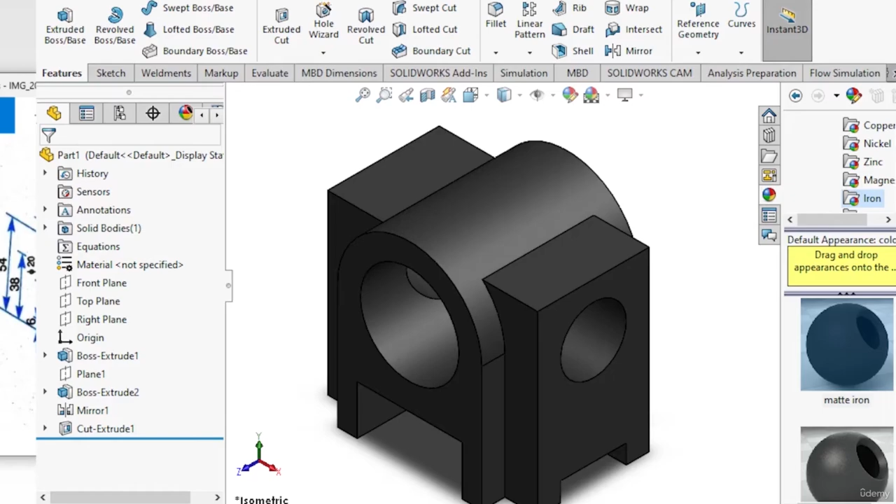Let's get started. Start from part, taking front plane, normal to. As the object is symmetric, we'll start with a central line. Another central line is required to get the location of the circle.

Now let's see the drawing. First of all, we have to draw one circle and one semicircle. Not circle, because we are drawing one right hand side only, so one semicircle and one quarter circle will be required. So we start from this arc.

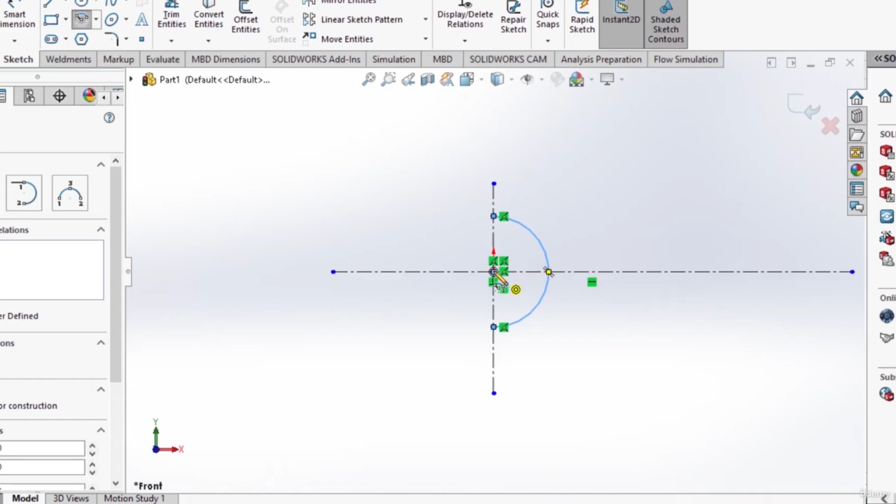Then we can start lines. We're drawing without any dimension, and the actual dimension can be provided after some time.

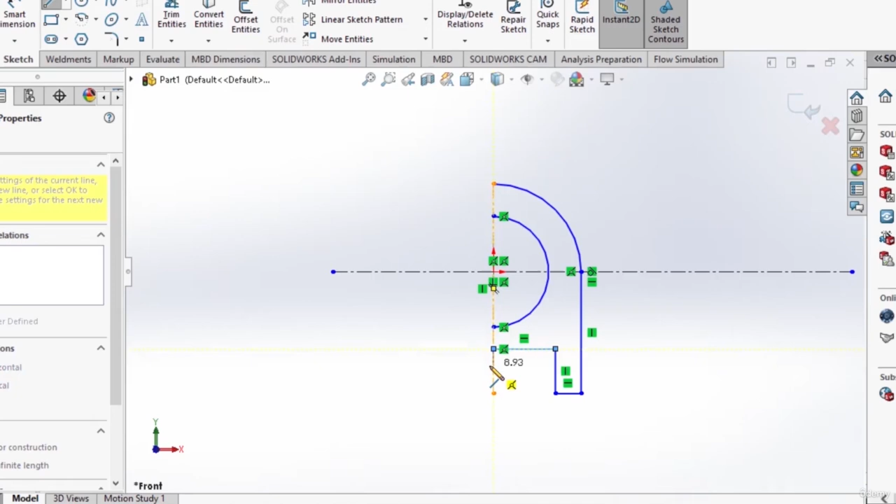Now let's provide smart dimension to that one and see the drawing again. The internal circle is having diameter equal to 30 millimeter. Now outside radius is 22 millimeter.

Smart dimension, this is 30 millimeter. Let's see the drawing again. Inside diameter is 30, and radius is 15 then. And in this case, radius will be 22 millimeter.

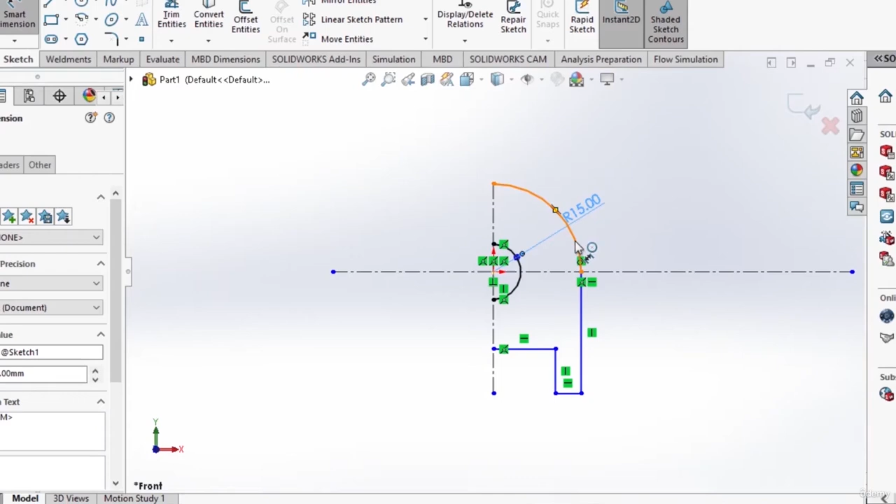Now these things appear. We can provide these dimensions also, no problem at all. The distance between these lines equal to 32 millimeter. How much is it? The distance between the lines equal to 32 millimeters.

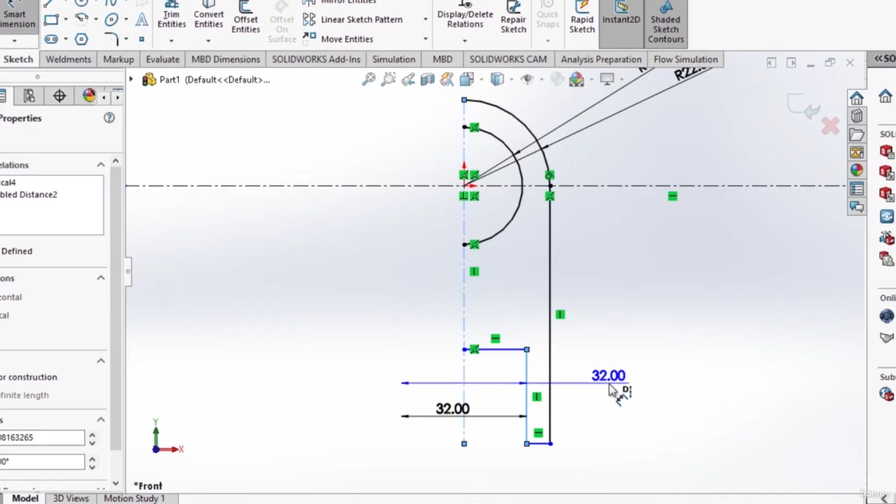So this one will be 32 millimeter, and also it will go up 15 millimeter. This is 15. Anything else? No, it's fine, it's done.

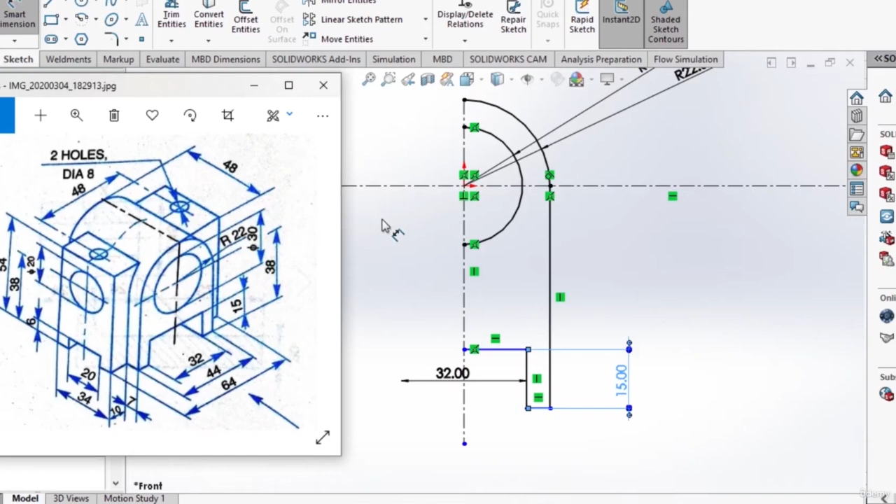So we have to make a mirror of this one. Exit from the sketch. Start mirror. It's asking to select the mirror entities. Select the entities, and asking to mirror about.

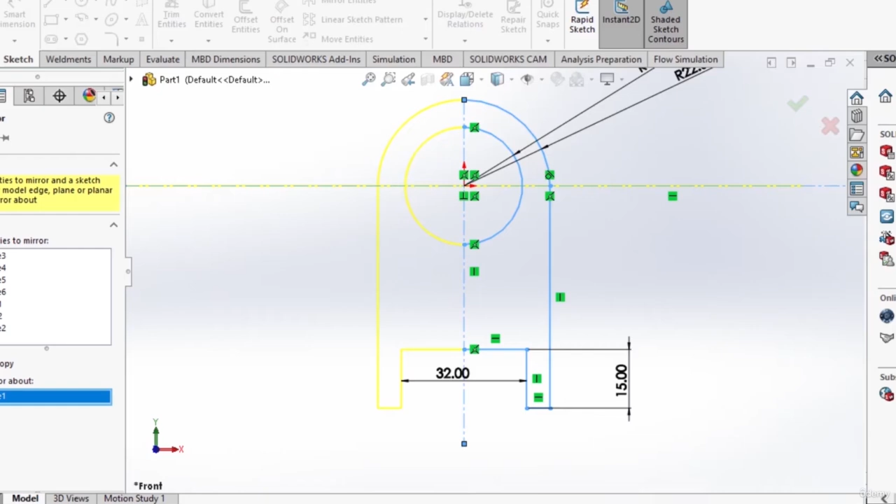So selecting the vertical axis, mirror is done. Next, we have to exit from the sketch and that has to be extruded. Select the sketch again, features, extrude boss base, and it should be extruded from the mid plane. Extrude thickness, you can see the depth, extrude depth will be 48 millimeter.

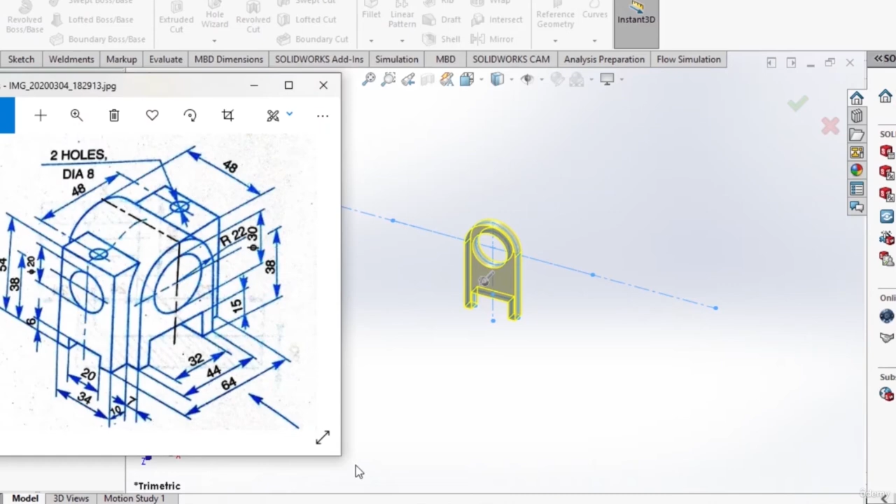Done, so again check. Next part, we have to move from left side. You can see the distance. The end to left hand and right hand is having maximum distance equal to 64 millimeter. That means from the central plane, this side will be 32 millimeter away.

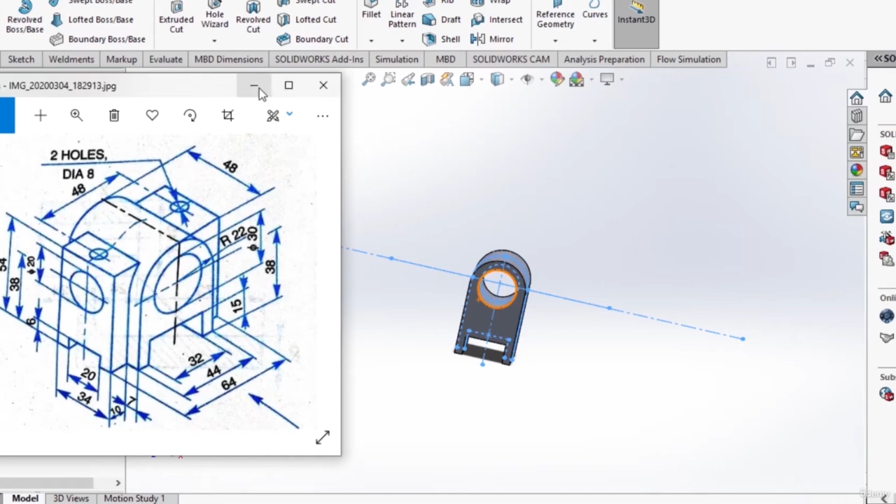So what we have to do is create a reference plane with respect to this central plane. You see the plane, this is the right plane. Right plane is at the center of this object. So with respect to the right plane, we have to make a plane which is having 32 millimeter.

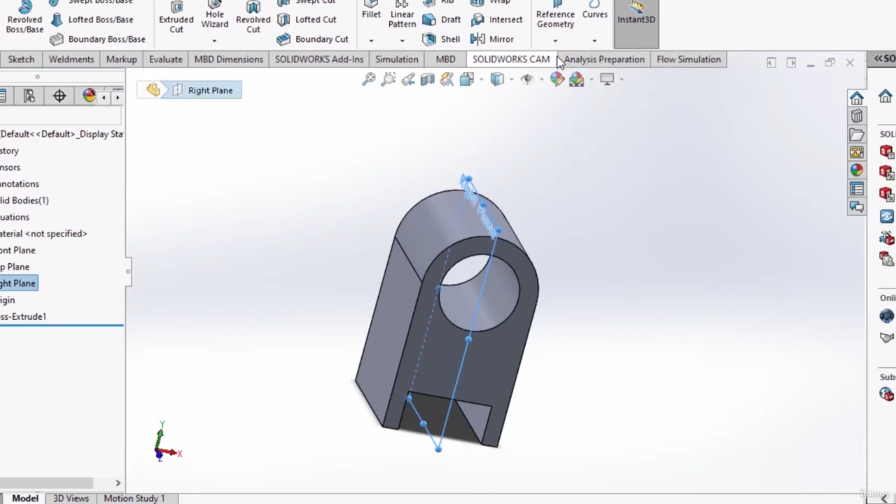So reference geometry, plane, and the offset distance equal to 32 millimeter. It will be on the opposite side, so flip offset. The plane is made. Now on the plane we have to draw.

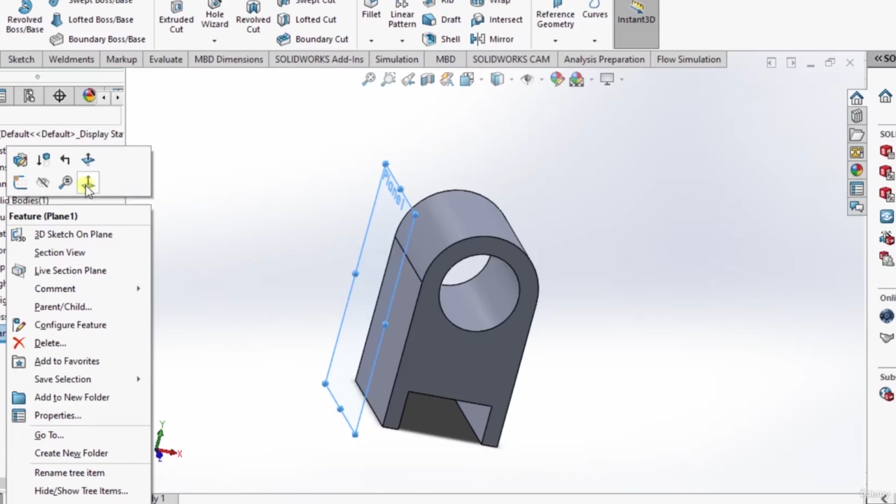Normal to plane, normal to. Let's see the drawing again. We have to draw again symmetrically because it is symmetric on both left and right sides. So better to draw a center line, sketch center line, done, sketch.

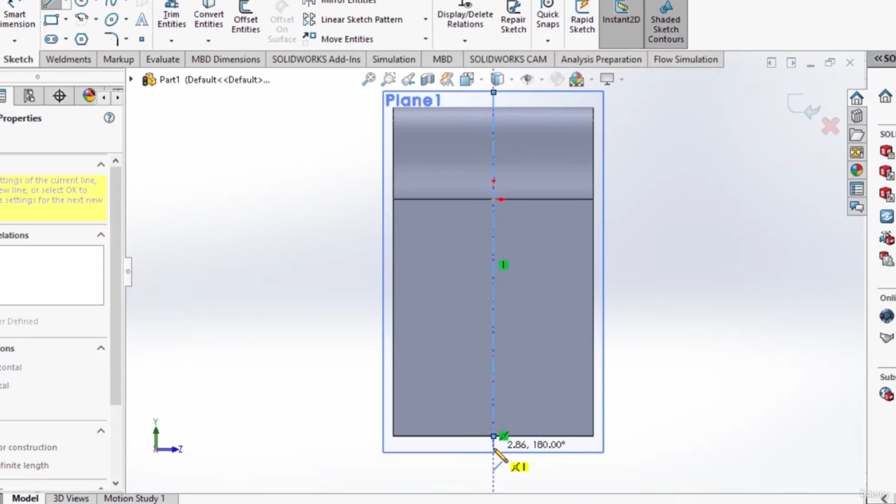Now roughly we can sketch this part. Finally we can provide smart dimension to that. Let's draw it.

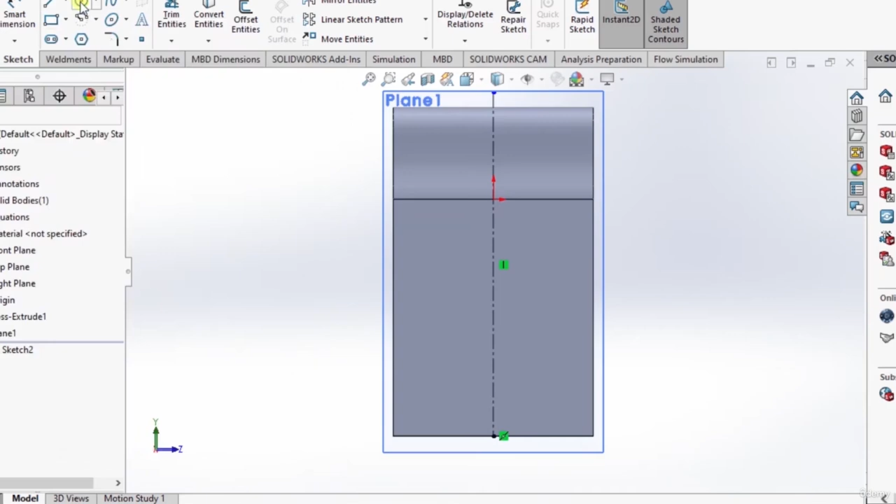We can draw one circular part. Not circular, we actually require a semicircular part. And again some lines are required, so straight line.

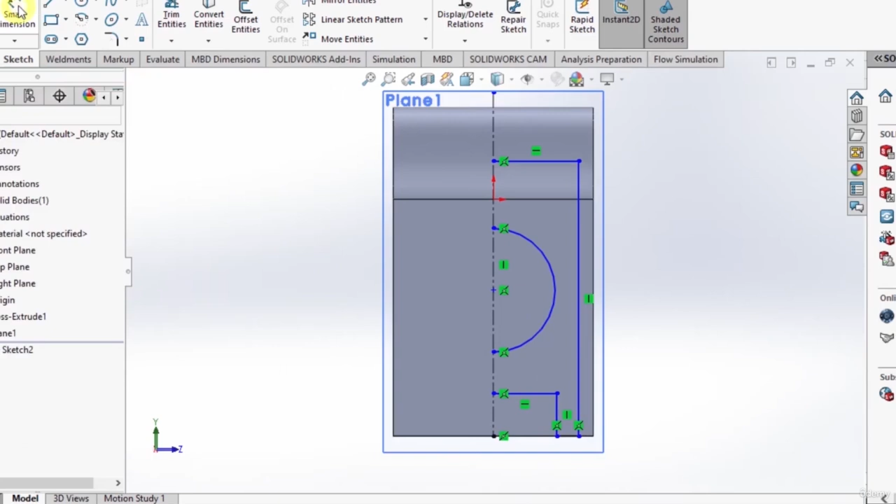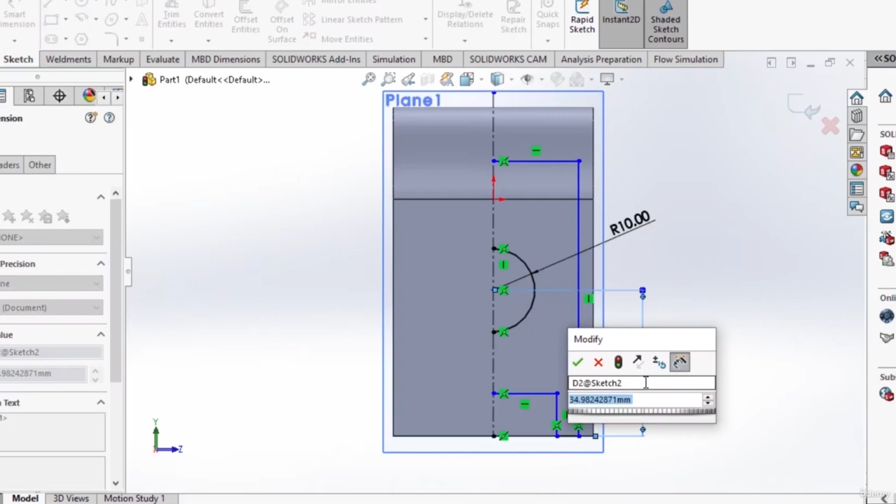Now let's put smart dimension to that one. The circle is having diameter 20 millimeter, the radius will be 10 millimeter. And from the base plane, location of the center equal to 38 millimeter. The total height equal to 54 millimeter, and this distance equal to 6 millimeter.

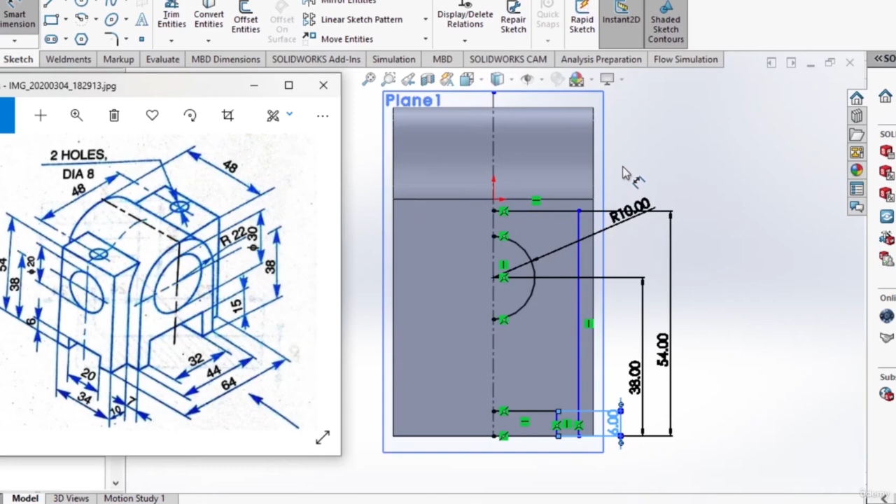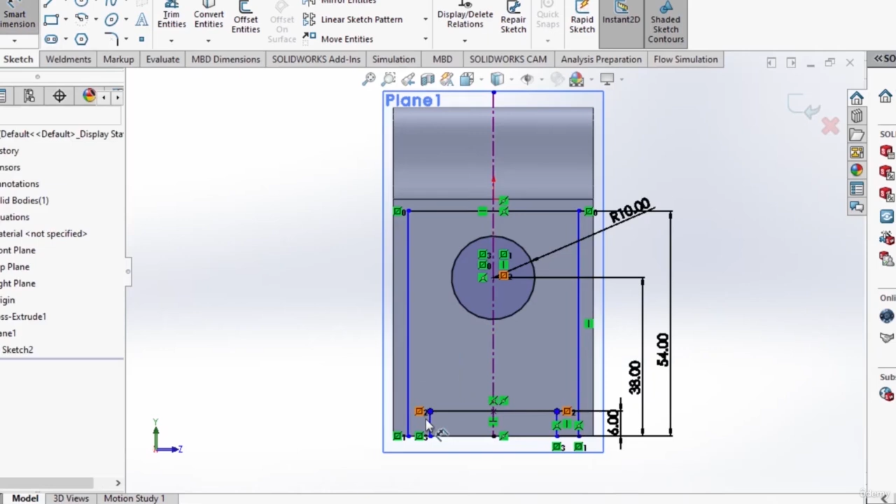Then smart dimension to be provided again. Let's see the distance. Internal side of legs will be 20 millimeter. Smart dimension, this is 20 millimeter.

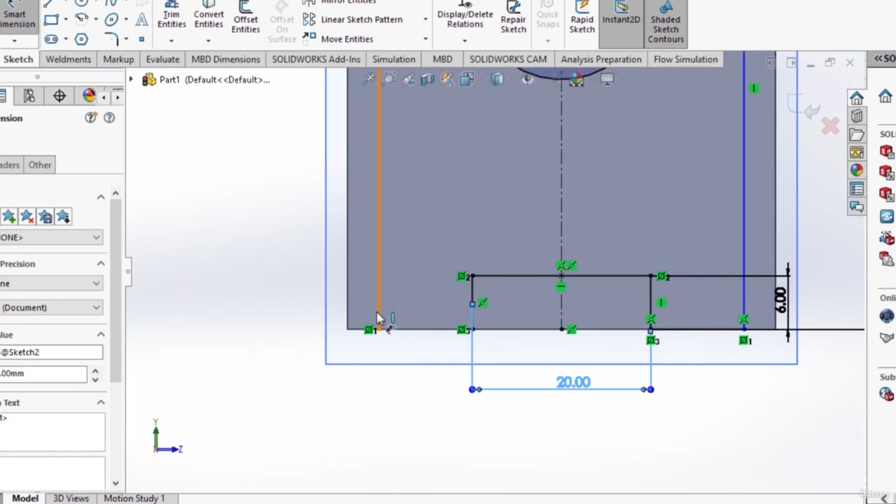And the external side will be 34 mm. External is 34 mm, right? You see, external 34 mm. Let's see the drawing again.

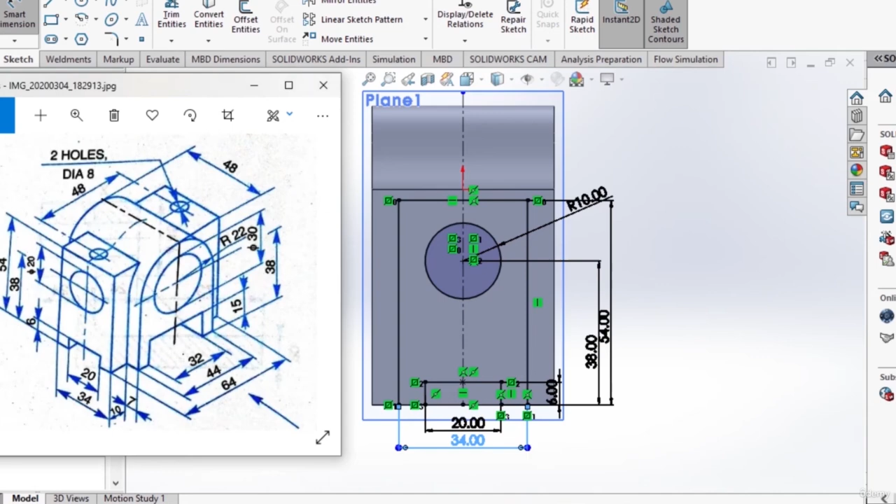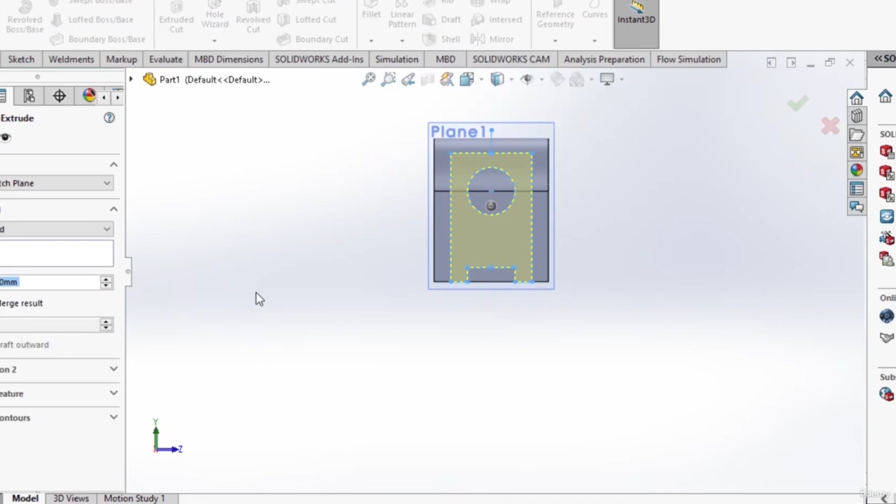The down parts are open, we have to close it. Again check, exit from the sketch. Select the sketch, extrude boss base. It should be extruded behind and up to next.

Done. Next, for the top of this one, we have to make one hole again. Select the plane, normal to. At any location you have to draw, then finally you can provide some dimension.

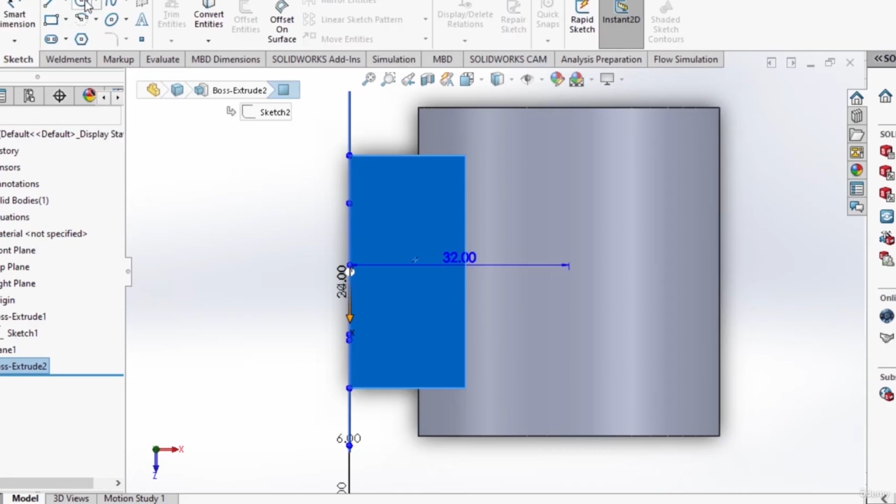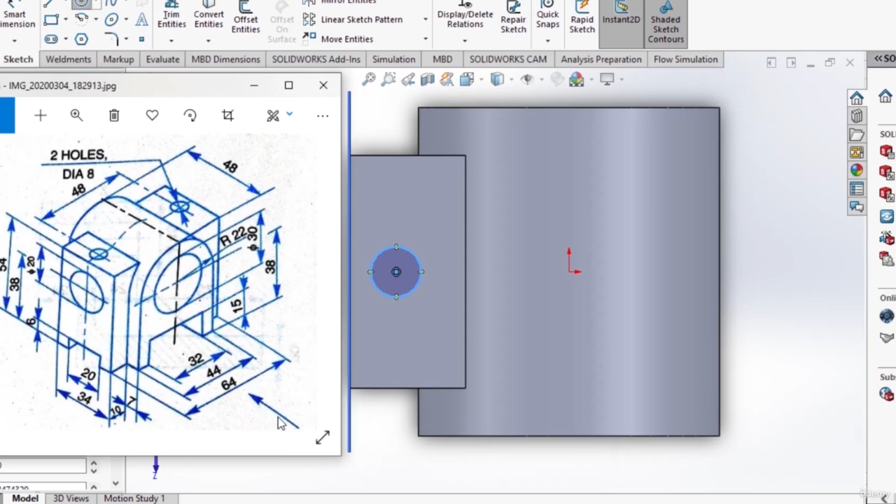On the central plane, the central axis, we are drawing the circle. Let's see the dimension of the circle. It is having dimension 8 mm. And from the central axis, on the central plane, it is having 24 mm distance. Diameter 8 and 24 mm distance.

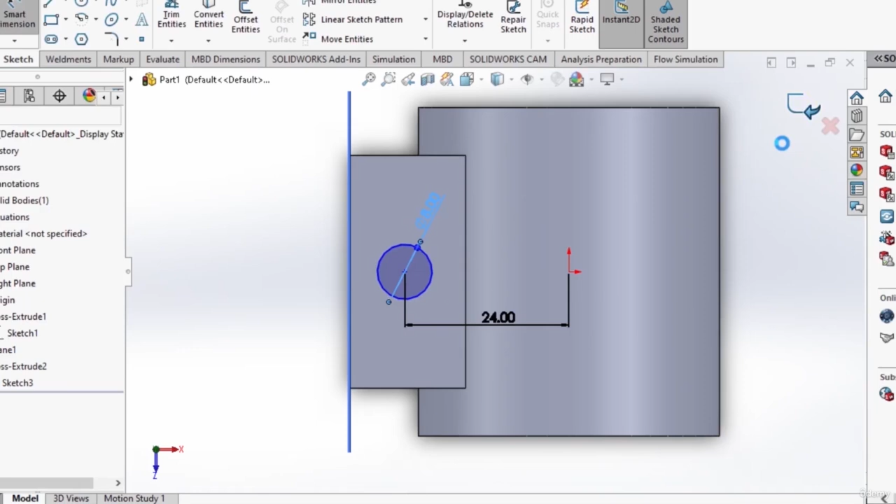Smart dimension, distance is 24 mm and diameter is 8. Exit from the sketch, and that has to be extrude cut. Select that sketch, features, extrude cut, and we cut up to next. Done.

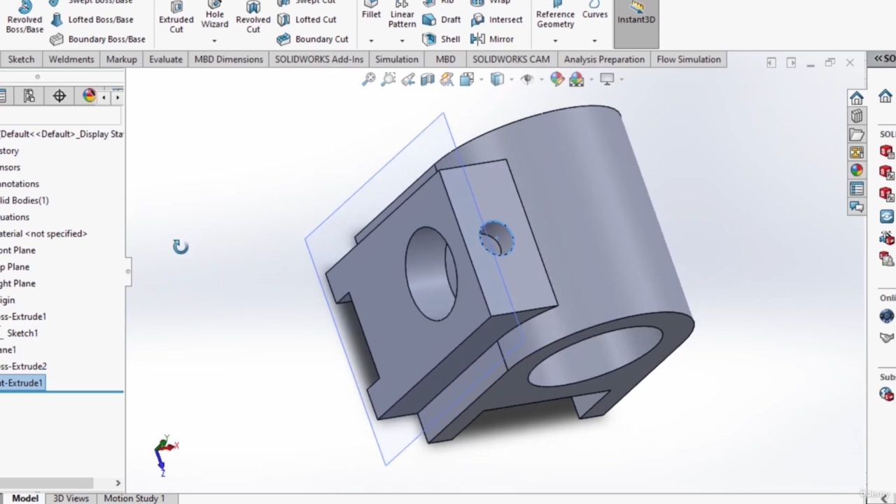You see the drawing, we have to make a hole at this position. So what we'll do is draw at this plane, normal to, we'll sketch a circle, that to extrude cut.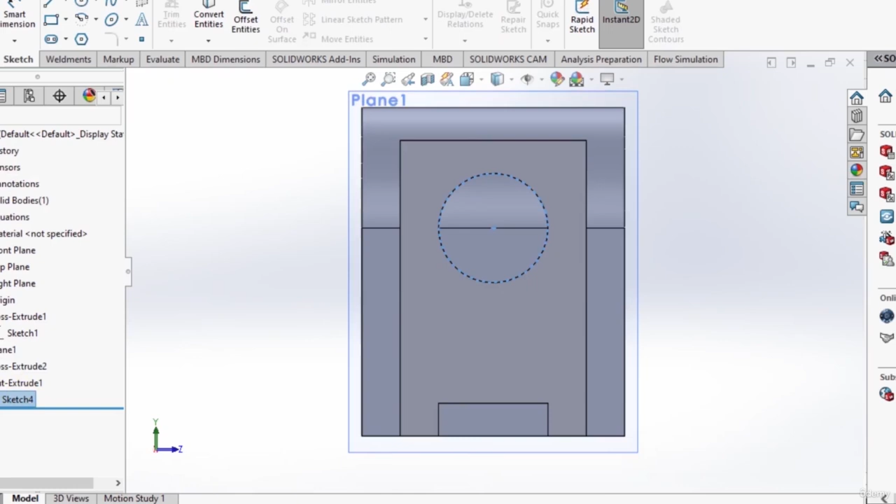Exit from the sketch, select the sketch again, features, extrude cut. Now while cutting, it should be up to next. Done, again check, this is cut.

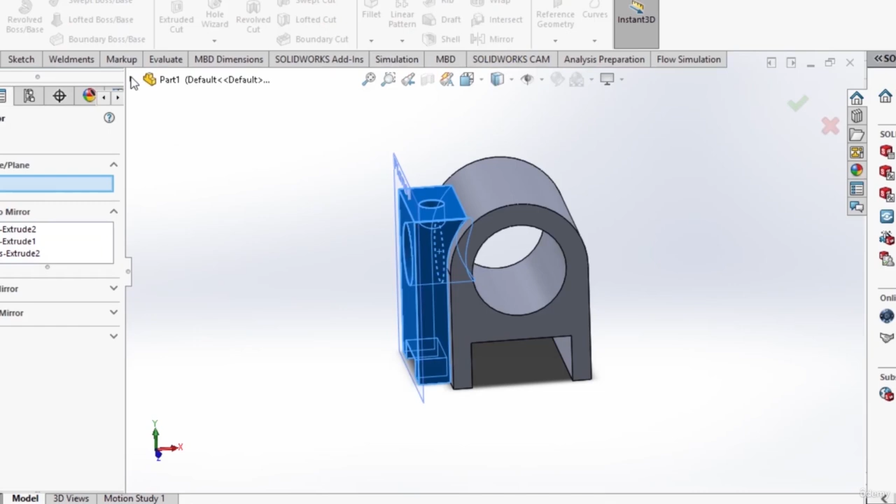Now the whole thing we have to mirror on the right hand side. So select all these objects and take the mirror plane also. Object is done, it's finally ready.

Now we can do one thing, this plane we can hide it. This is ready, right? Let's change it to isometric view.

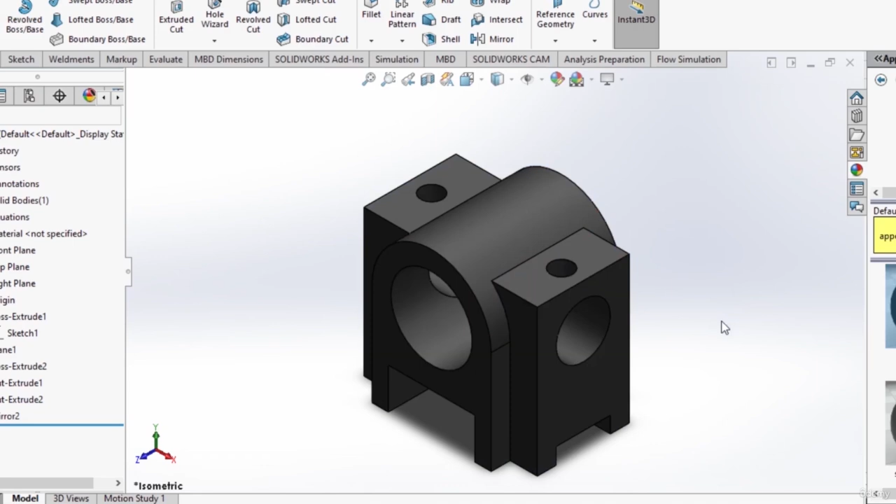And again, for better appearance, we can change it to a different color. As metallic color we can provide, appearance, metallic appearance we can provide to iron, matte iron we are providing. It's done, and to have a bright look, we can change the background a little bit. Plain white. This is our drawing.

So while modeling this one, we learned a little bit of extrude boss base, extrude cut, mirroring, and also by the same time we learned how to make a reference plane with respect to some other plane.